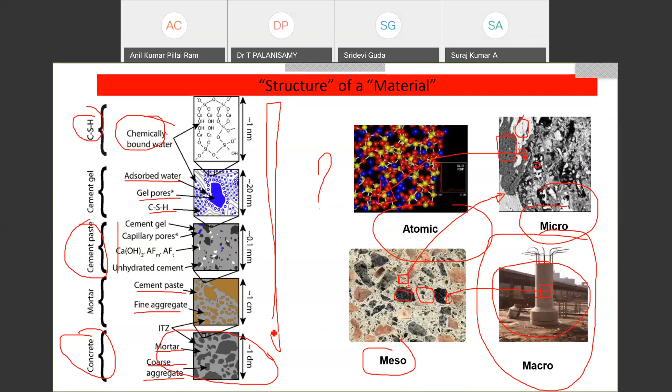So we are using this product as a concrete. We have these kind of stages to the micro characterization properties of the concrete. We will see one by one. Now this is the scales, size of scales in concrete. We don't know about that. What is the micro characterization of the concrete here?

But look at this small part of the LIC building at Chennai. Look at the small part. You have seen fine aggregate, coarse aggregate, and so on. Again you go finer in micro scale. You can get these kind of things, black and white, there is irregular nature, and so on. This is the size of scale in concrete.

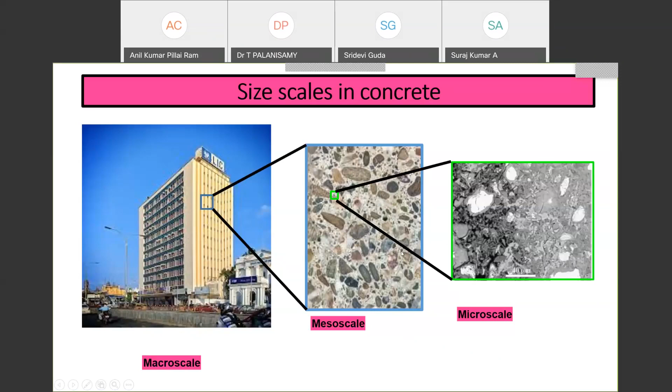But we are very strong in the compressive strength of that concrete. We have achieved nearly about 200 Newton per mm square. That is a 200 MPa concrete available. But the big question is, what is the durability of that kind of concrete? Then, why are we using the huge quantity of cement when compared to the steel? There are at least three primary reasons we are using the cement. They possess excellent resistance to water.

So look at the steel. Maybe put the steel in the water. What will happen? It tends to corrode. It is the cement and the concrete only that possess excellent resistance to water. It can be formed into a variety of shapes and sizes. That is a major advantage of the concrete.

It can be engineered. This word is very, very important. Engineered according to our convenience, according to our need, according to our consumption demand. We can produce, or we can manufacture, or we can change. That is the major advantage of the concrete. That's why most of the world's people use concrete, next to agricultural products.

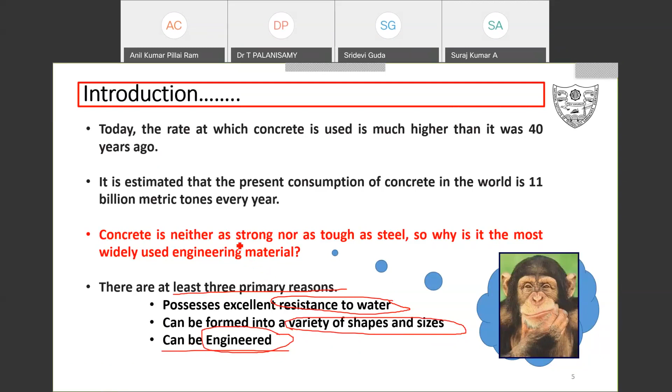Now, let's take a little bit of the fundamentals of concrete. What is concrete? In the older days the definition of concrete was different. The concrete is made of fine aggregate, coarse aggregate, water, cement, and so on. Now, the concrete is a filler and binder. Filler may be fine aggregate, coarse aggregate, fly ash, or mineral admixtures, or some admixtures, or any filler material, even thermocol also. The binder, you can have the cement or polymers, etc.

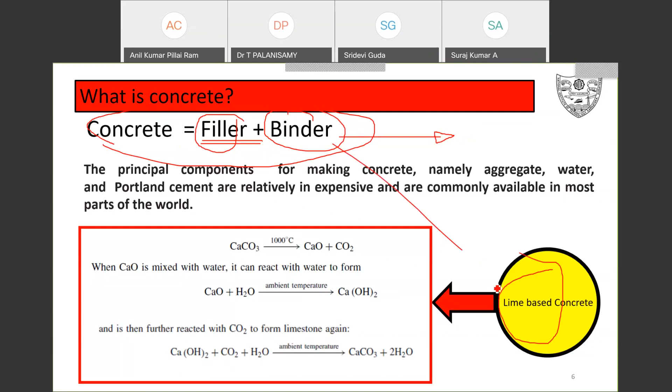Some even go for what we call gum also. It is possible to make it as a concrete. Suppose we use lime as the binder, it's called a lime-based concrete. Suppose we use gypsum, this concrete is called a gypsum-based concrete. Now, this is the cement-based concrete. Cement-based concrete, we have Portland cement, water, fine aggregate, coarse aggregate.

Already I told you that Portland cement and water is called cement paste. Again, we add the fine aggregate, it's called mortar. Again, you add coarse aggregate, it's called concrete. So these are the things. So I want to concentrate more on the cement paste. Cement paste, that is Portland cement plus water.

So people may ask, maybe BTech students or MTech students doing research or projects in concrete, how is this kind of thing very useful, or how does it reflect the exact answer of the concrete? Coarse aggregate is one of the filler materials in this concrete. So the material contributing more strength is cement paste. The mortar and the cement paste are the important materials for strength.

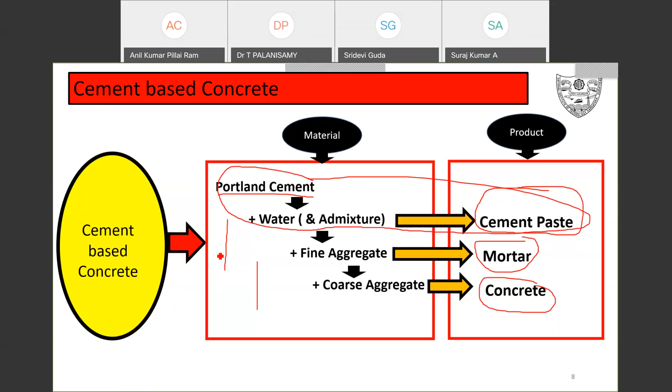Even in our research group, we are not doing most of the research in concrete. We are doing the research only on cement paste and mortar. Because if you go for the concrete, you waste material, also the time and the casting, everything. So we can do the research at the mortar level itself. If the result is positive, then only we go for the concrete. That's why we're doing the research.

So what is the limitation of the concrete? These are the limitations. Look at the brittle, the strain softening; this is quasi-brittle, this is ductile. Look at the difference between the concrete and the steel. The concrete, we have the failure like this. The steel, you have the well-defined thing called the strain hardening effect. Here, strain softening effect. Now, a lot of research is going on on how to make the concrete possibly like this.

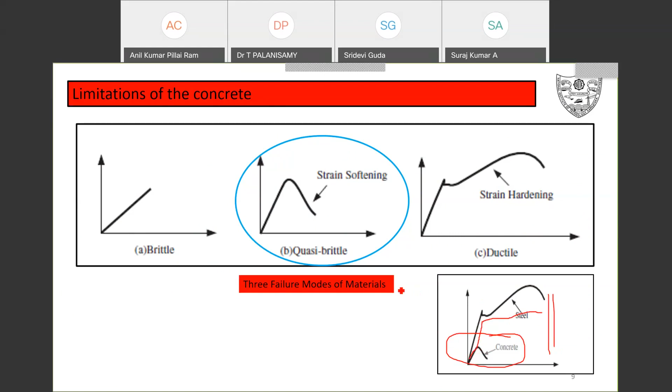So, a lot of research is going on regarding the limitations of concrete, even with how concrete and the cement industry use it. Now, introduction to Portland cement.

We produce the constituents from calcium, silica, alumina, iron, and sulfate. Where do you obtain these? Calcium comes from limestone available in our earth crust, marble, cement rock, alkali waste clay, chalk, sea-shells, etc.

Silica is nothing but quartz, a white color stone called quartz. Silica is also obtained from fly ash, clay, limestone, sandstone, etc.

We did very good PhD work in clay related things. We wanted to calcine the clay. One of my students, Dr. Sudha, completed work in this area of clay-based cement.

Then alumina comes from bauxite, fly ash, shale and slags. Then iron and sulfates. These are the constituents that make up cement.

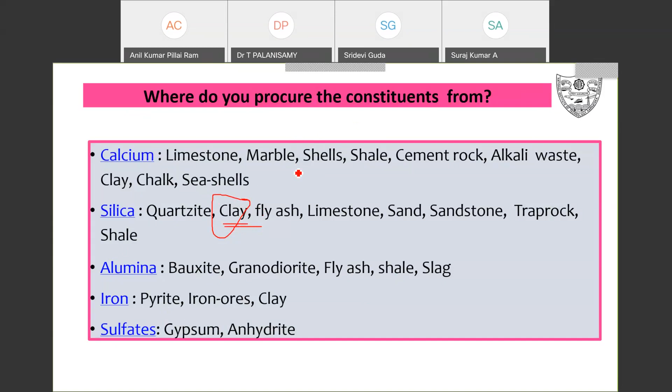Then compound composition of clinker or cement. Some places I may mention clinker and cement interchangeably. This composition has 4 major components formed from the oxides under high temperature in the kiln.

Name of the oxides: tricalcium silicate, called C3S, 3CaO.SiO2. Dicalcium silicate, 2CaO.SiO2, simply called C2S. Then tricalcium aluminate, 3CaO.Al2O3, that is C3A. Then tetracalcium aluminoferrite, 4CaO.Al2O3.Fe2O3, called C4AF.

These are the main compounds widely used in cement manufacturing. Now we want to look at, if I add water into the cement, which component reacts first, which component gives the most strength, and how to quantify these kinds of things we want to see today.

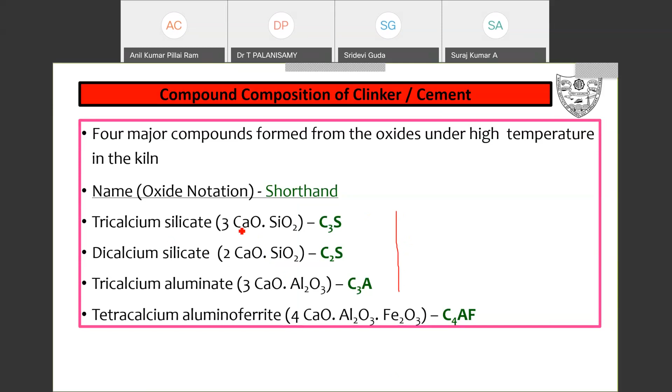Now, summary of the cement compounds - this may vary from brand to brand, and it varies with respect to special applications of the cement also.

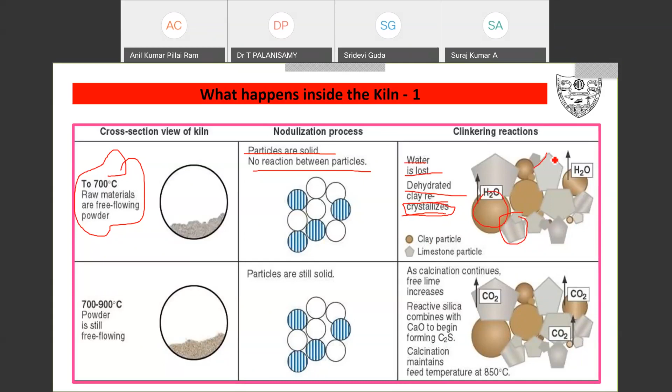Then dehydrated clay recrystallizes - this is called clay particles, you can see. Then limestone particles, you can see like this, a pentagonal shape. Then H2O is going out. This is the clay particles, this is the limestone particle. Now increase the temperature to 700 to 900 degrees centigrade.

Powder is still free flowing, particles are still solid. What is the reaction happening inside? As the calcination continues, free lime increases - this is calcination. Calcination is nothing but heating the limestone, it becomes a calcination process. Due to calcination, the free lime increases. Reactive silica combines with CaOH, as well as CaO, to begin forming the C2S compound.

The first compound forming in the cement is C2S. How does it form? Reactive silica combines with CaO, so we obtain C2S. The calcination maintains a feed temperature at 850 degrees centigrade.

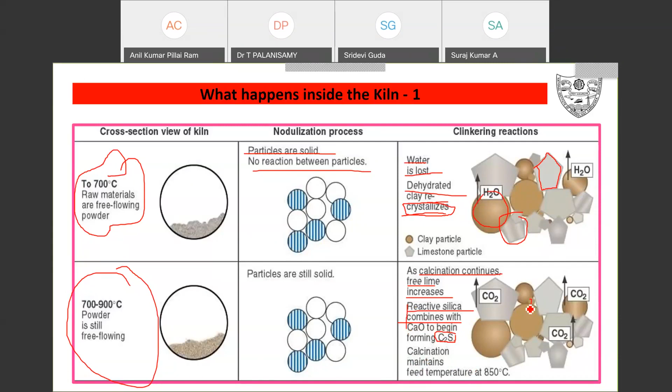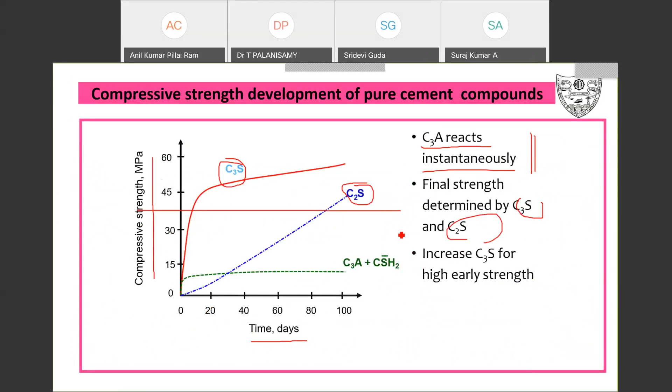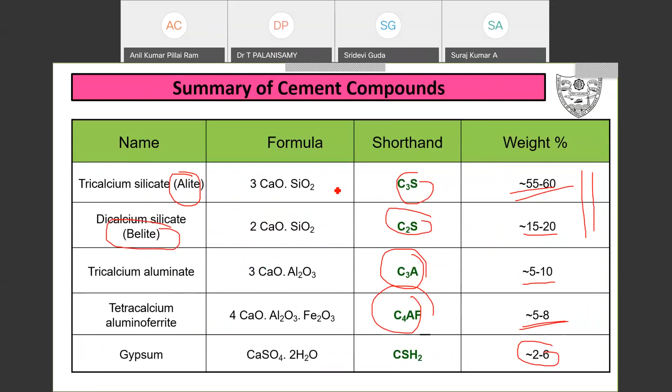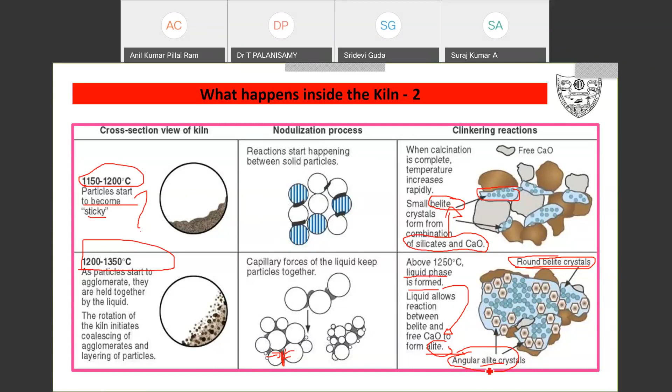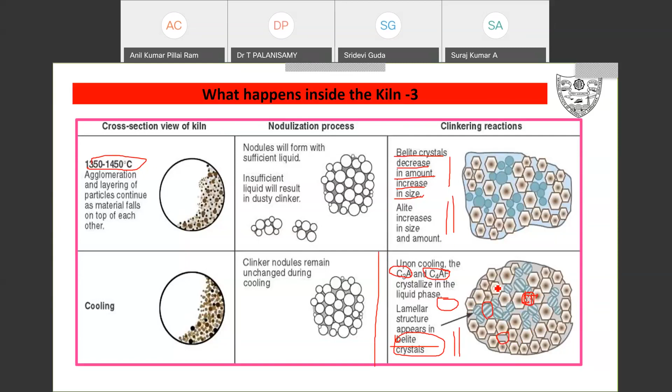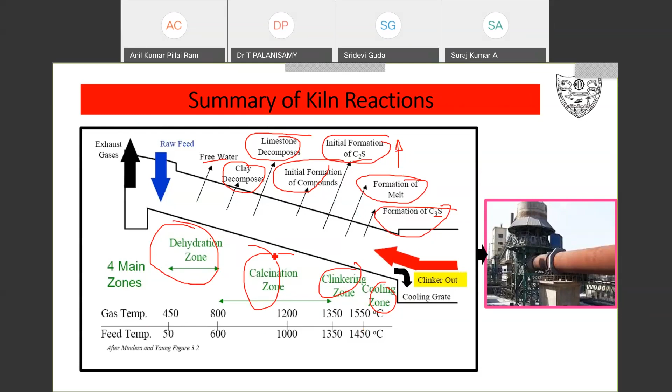The first component forming in the kiln is C2S, and lastly we see tricalcium silicate form around 1550 degrees centigrade. This is the typical picture of a kiln. Now, the approach to studying concrete - what is the necessity of studying the microstructure of concrete?

Microstructure of the concrete. So, look at... are you able to see it? Yeah, it's good. Now, the approach is to study the concrete.

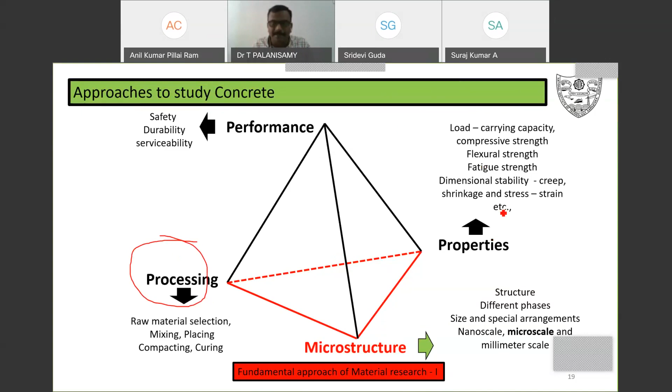What is the fundamental approach to material research? Before 1999, the structure was like this: one is processing as the main factor, and property; the other one is microstructures. With these three, we can achieve performance. Performance is nothing but safety, durability, serviceability.

Processing is nothing but raw material selection, mixing, placing, compacting, curing. Properties and microstructure mean the structures, different phases, size, spherical arrangements, special arrangements at micro scale and millimeter scale. Property is nothing but load carrying capacity, compressive strength, and so on. So in earlier stages, we were concentrating on processing, properties, and microstructures.

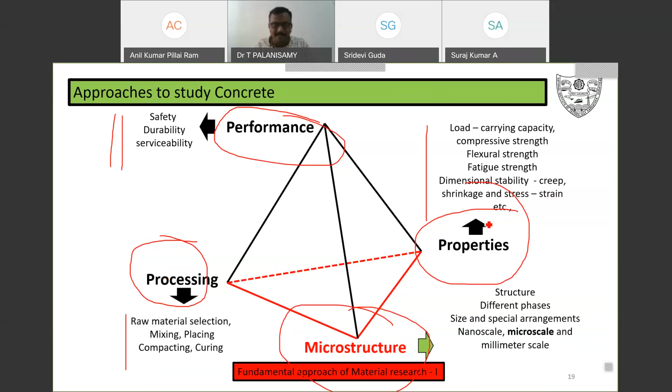Then, the fundamental approach to material research adds synthesis, processing, performance, properties, microstructures. From this, we can get end use or constraints. So microstructure is a very important factor to achieve this end use or use needs or constraints.

Again, measurements is an essential part of material science and engineering. At present, we are using these also. All these things are controlled by means of measurements, which is called quality control. Then only we can go forward. So microstructure is a very, very important factor at present to find what is the role of any material for the end users.

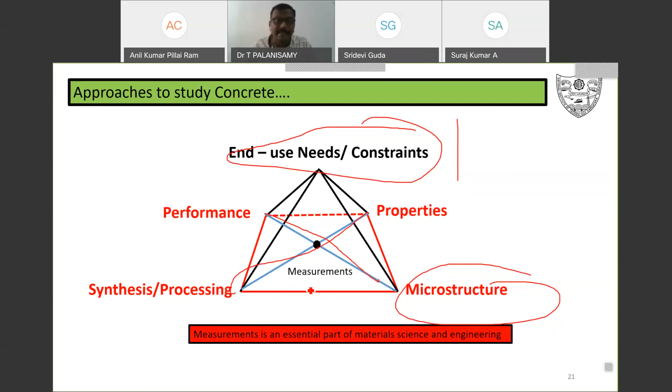Now, approach to the concrete study. A close look at the historic development of concrete shows that concrete has been applied in practice for more than 150 years without any scientific background. I'm not saying this, this is said by P.K. Mehta. Most practice followed empirical formulas and observations.

In olden days, attention was paid mainly to properties of concrete, especially compressive strength. Most research people worked in this area of compressive strength; very few did research on performance-wise and durability aspects. Very limited understanding had been achieved on the material structure of concrete because of the lack of instrumentation facilities at the nanometer, micrometer, and even millimeter scale.

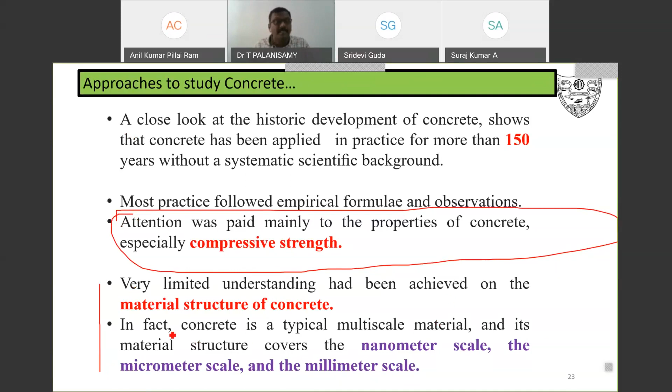Now, approach to concrete study. The concrete phases at nanometer scale mainly constitute the calcium silicate hydrates. Hereafter, I will speak more about CSH, that is calcium silicate hydrates. It is believed that CSH contributes most of the binding strength.

CSH contributes most of the binding strength, and understanding the nature of CSH is key to revealing the behavior of concrete. So CSH is a very important factor. The structure of CSH at the atomic level determines the nature of mechanical properties, transport mechanism, and dimensional stability of hydrated cement paste. So CSH is a contributing factor for mechanical properties and transport mechanism.

Transport mechanism means, if a building is constructed near the seashore, like in Chennai or Visakhapatnam, the air there attacks the concrete. The chloride is present in this water as well as air - airborne chloride and waterborne chloride. These chlorides easily enter into the structure, and concrete acts as a transport mechanism for these chloride ions to enter the reinforcement, causing it to corrode, and the life of the structure will be lost. So the contributing factor for this transport mechanism is CSH.

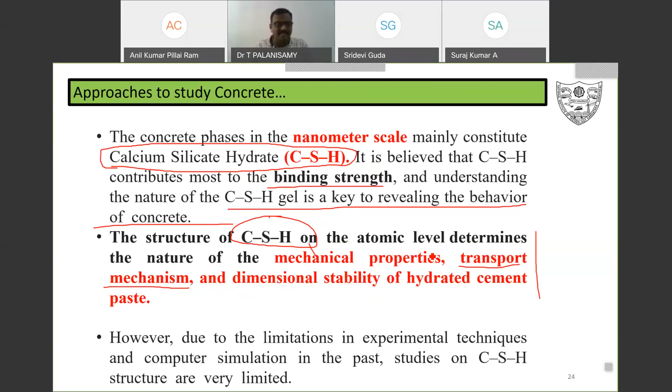However, due to limitations of experimental techniques and computer simulation in the past, studies on CSH were very limited. Nowadays, with the fast development of microstructure measurement technology and powerful computer simulation methods, it is possible to develop concrete technology in a more scientific manner, even at the CSH level. That is the advantage at present - we can do this research at the CSH level. Then, what else do you need?

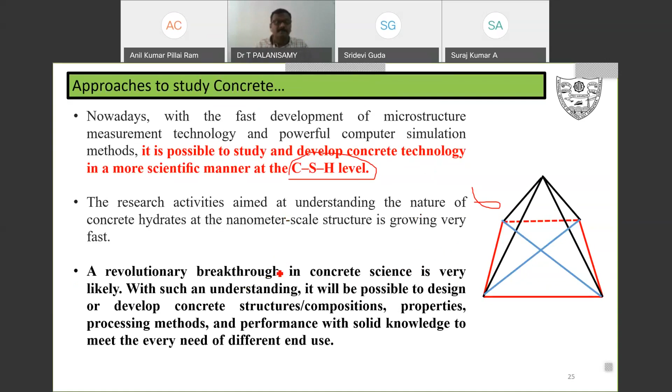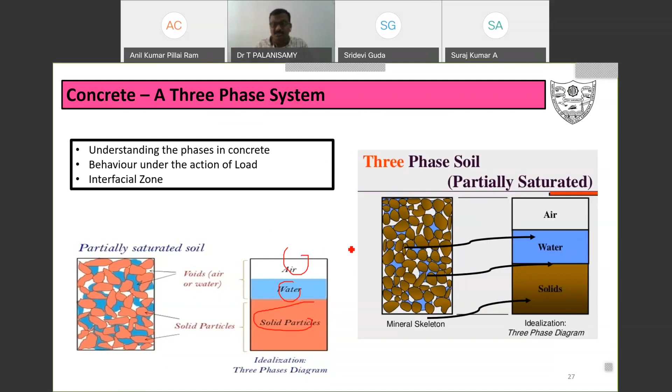Look at, concrete is a three-phase system. We have seen this three-phase system in soil mechanics also. For the calculation purpose, we can look at soil like this: solid particles, air and water. This is the three-phase diagram for the soil. Similarly, here also, look at the concrete three-phase system.

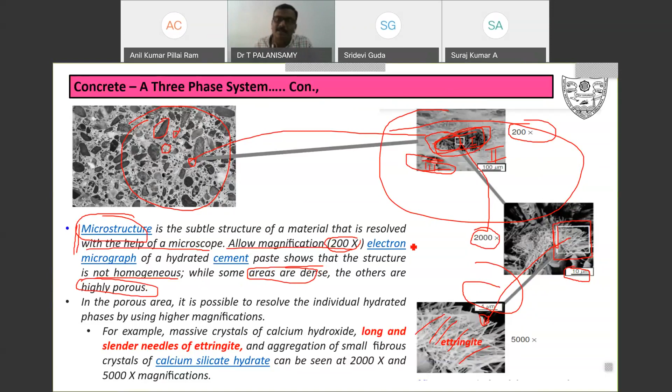Now, the structure is not homogeneous. Some areas are dense and others are highly porous. This area may be dense in nature, this area porous in nature. In the porous area, it is possible to resolve the individual hydrated phases by using higher magnification.

For example, massive crystals of calcium hydroxide, CH, and long and slender needles of ettringite. I will tell you what ettringite is. Suppose you look at a scanning electron microscope, SEM, and see any needle-like structures; they may represent ettringite. How it forms, I will tell you.

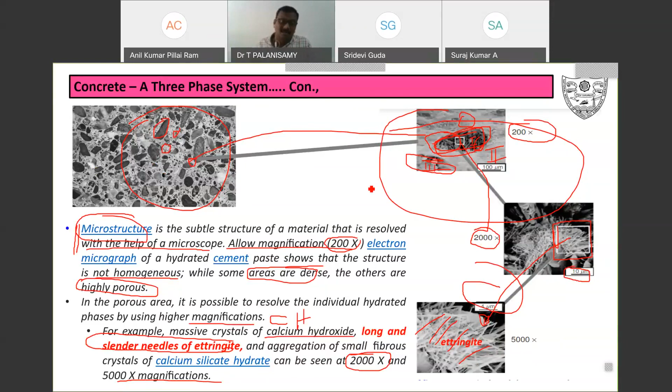And aggregation of small fibrous crystals of calcium silicate hydrates can be seen only at 2000 and 5000 magnification. So what I'm trying to say is there is a lot of heterogeneity, a lot of non-homogeneity in this concrete, which you can see only through microcharacterization of the concrete.

Now, the microstructure of concrete can be described in the following three aspects. One is hydrated cement paste, which represents the hydration products of the cement and water reaction. If you add water to the cement, the reaction starts, and the product is called the hydration product. The main product of this reaction is calcium silicate hydrate. I want to talk much more about this area.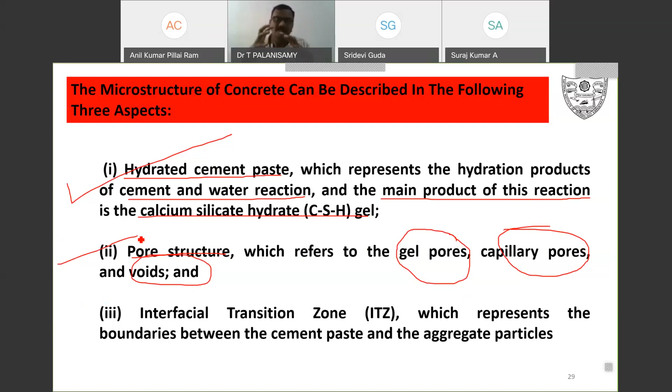The other one is pore structure, with reference to gel pores, capillary pores, and voids. Reducing the water cement ratio is good for strength and durability. But in the field, some people may not follow the water cement ratio strictly, and may not compact the concrete well. What will happen? In between the aggregate we have gaps, called pores. Honeycombs tend to form. I'm not talking about that.

Inside this microstructure, at the micro level, what are the pores, what is the capillary, what are the voids? These kinds of things I want to speak more about. Then the interfacial transition zone, called ITZ. This represents the boundaries between the cement paste and the aggregate.

This is another major area. I'm not talking much more about this; we need one more day to discuss the interfacial transition zone and how to quantify all those things. I want to take these two only. Now,

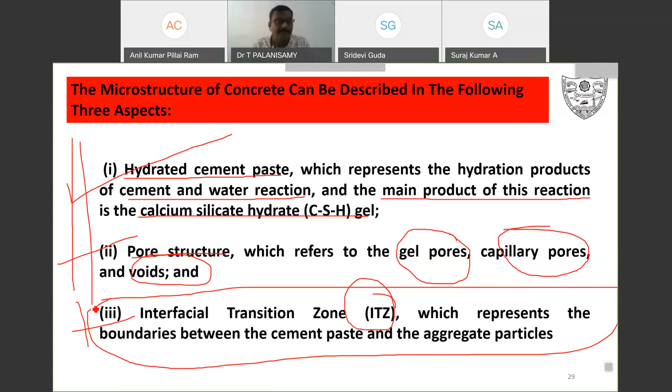instruments for microstructure: scanning electron microscopy, called SEM; transmission electron microscopy, called TEM, T-E-M; atomic force microscopy, called AFM. According to your convenience and your research, you can choose the scanning electron microscope, transmission, or atomic force microscope. Suppose I want to deal with any material at the nanostructure level, meaning magnification maybe 10 lakhs, you go for AFM and TEM.

We can find some details of CSH. Suppose I want to know about the arrangement and juxtaposition of cement paste particles, sand and capillary voids, you can go for intermediate SEM. Then high magnification SEM, with magnification 2000 to 20,000.

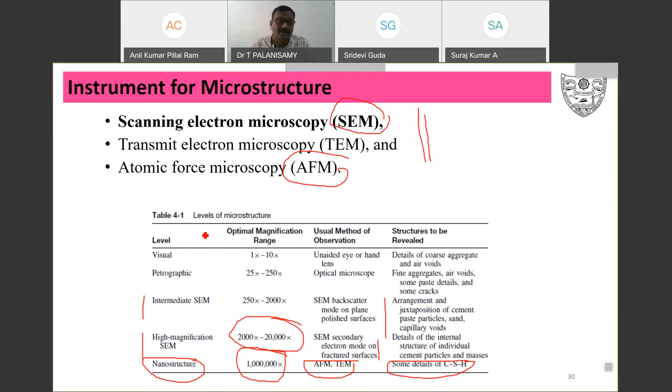Scanning electron microscope, secondary electron mode: on fractured surfaces, we can find details of the internal structures of individual cement particles and masses. This is according to our convenience only. We go for different types of instruments for micro characterization.

Then the microstructure of the hydrated cement paste. The term hydrated cement paste used here refers to the paste made from Portland cement and water. That is called hydrated cement paste.

Unhydrated Portland cement is a gray powder composed of angular particles, typically in the size range of 1 to 50 micrometers. It is produced by pulverizing clinker with a small amount of calcium sulfate, the clinker being a heterogeneous mixture of several compounds produced by high temperature reactions between calcium oxide and silica, alumina, and iron oxide. These things happen inside the kiln, as I already told.

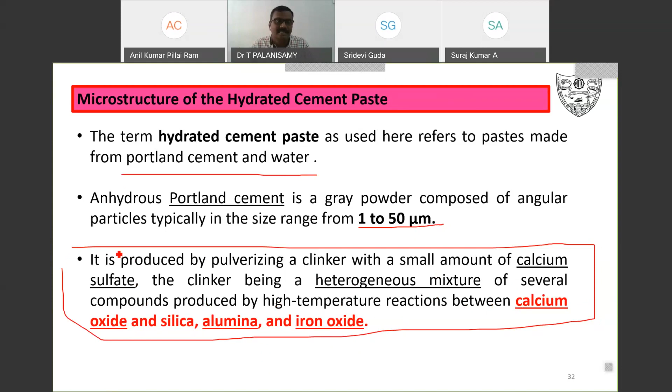Then the microstructure of the hydrated cement paste. I come to the exact picture today. The chemical composition of the principal clinker compounds corresponds approximately to C3S, C2S, C3A, and C4AF, like this. In ordinary Portland cement, the respective amounts usually range between 45 to 60, 15 to 30, 6 to 12, and 6 to 8%.

Now, when Portland cement is dispersed in water, what will happen? The calcium sulfate and the high temperature compounds of calcium begin to go into solution, and the liquid phase gets rapidly saturated with various ionic species. As a result of interaction between calcium, sulfate, aluminate, and hydroxyl ions, within a few minutes of cement hydration, needle-shaped crystals of calcium trisulfoaluminate hydrate are formed.

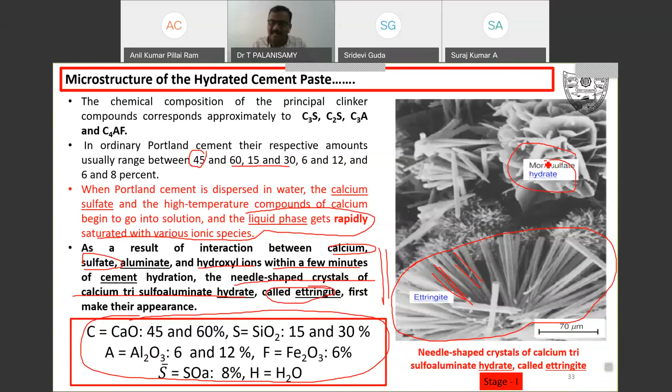So how does it show? Using the scanning electron microscope, you look at the cement paste and see this kind of structure. This is represented as the ettringite structure: the needle-shaped crystals of calcium trisulfoaluminate hydrate are called ettringite. Monosulfate, I'll tell you how it forms.

What we want to look at here is, what is the density of this ettringite? What is the length? How can we measure it? This is another stage, advanced microcharacterization. Again, microstructure of hydrated cement paste.

What happened? A few hours later, then a few years later, the large prismatic crystals. What are prismatic crystals? Already told you, these things are studied in geology. Prismatic is like a pencil. This prismatic crystal shows a uniform cross section. Typically, they have 3, 4, 6, 8 or 12 faces which are parallel to the crystallographic axis.

Crystallographic axis is nothing but we want to rotate these materials in this direction. How many faces? Suppose this axis, how many faces? Like this, you can find the crystallographic axis.

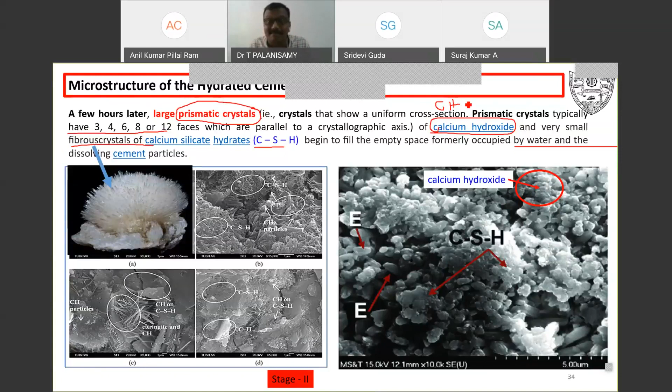Then a few hours later, large prismatic crystals of calcium hydroxide, CH, and very small fibrous crystals of calcium silicate hydrates begin to fill the empty spaces formerly occupied by water and dissolved cement particles. What is the next one formed? Next formed is CH, calcium hydroxide. Another one, CSH, forms. So these two things fill the empty spaces of the water.

Suppose you add more water, what will happen? Water stagnates inside this concrete. There are no spaces given to the CSH and CH formation. Now look at this, some fiber crystals, calcium silicate hydrates with sharp fiber crystals. So look at this, the CSH, calcium hydroxide. You have seen this kind of thing now. That is called as a, like needles.

Needles. Now, why does it become black and white? We know about the BTech students; for them, I spend 2 minutes here. Look, suppose this is any product, any metal. I want to pass the light. What will happen? If it's metal, it immediately comes back, a reflector. This light also has some amplitude. With respect to this amplitude, it's coming back immediately.

Suppose these areas may be vacuum or voids. The light goes in this direction, it takes more time coming back. So these areas may be black in color. Voids, any gap or any vacuum, you can see as black in nature. Metal is very dense, it looks white in nature. You look here, it is gray in nature.

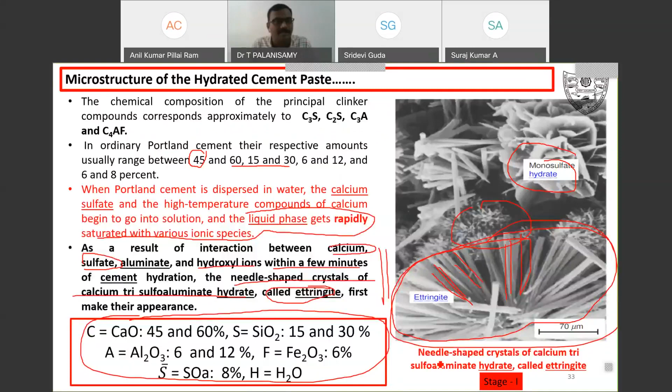In primary ettringite formation, the structures look like needles, right? Secondary ettringite formation forms monosulfoaluminate hydrates that look like plate-like structures, a hexagonal plate morphology. Hexagonal plate morphology is nothing but, look like this, like the petals of roses. Rose petals with some seeds. These structures are called hexagonal plate morphology. Now, the needle-like crystal structures become like a hexagonal plate morphology.

So, this is primary ettringite formation. This is secondary ettringite formation. Suppose you look at any scanning electron microscope images, any needle shape you have seen is called primary ettringite formation. After that, we have seen these kinds of petals. This is called secondary ettringite formation.

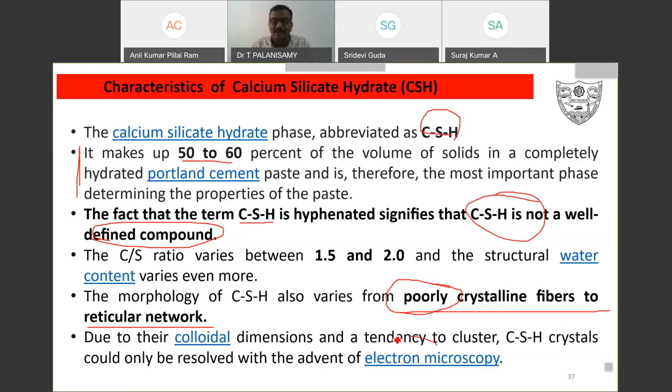Due to their colloidal dimensions and tendency to cluster, CSH crystals could only be resolved with electron microscopy. The surface area is of the order of 100 to 700 square meters per gram. The strength of the material is attributed mainly to van der Waals forces. If chemistry people do research, they can study how adding mineral admixtures to the cement paste changes the van der Waals forces. The size of the gel pores, the solid to solid distance, is reported to be about 18 angstroms.

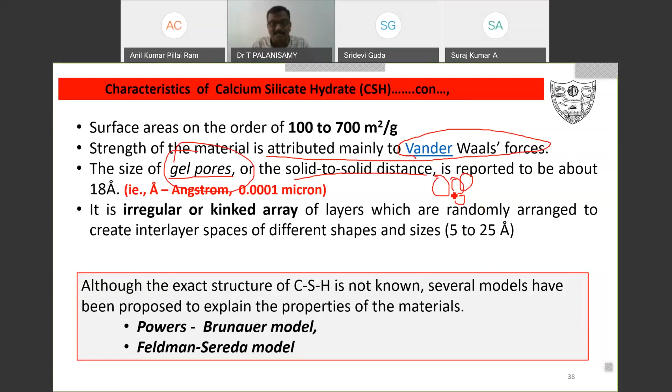What is a gel pore? The CSH gel forms here, one gel here, another gel here, so in between we have some pores. That is called a gel pore. This is the micro level structure. It is an irregular or kinked array of layers randomly arranged to create interlayer spaces of different sizes, 5 to 25 angstroms, one over another.

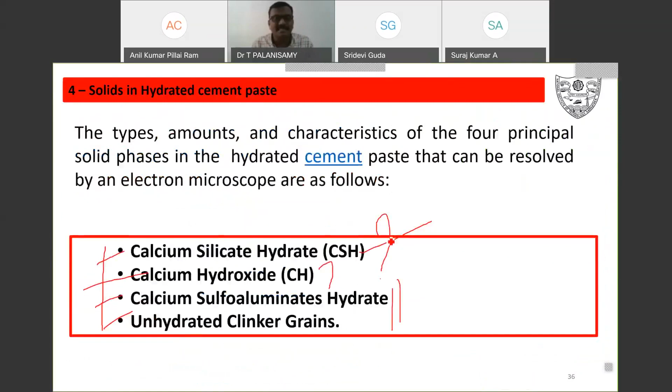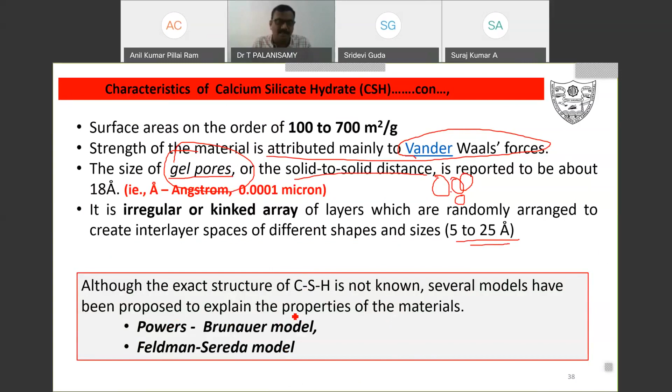Next, the first solid is CSH. The second solid is calcium hydroxide, called CH. This contributes 20 to 25% of the volume of solids in the hydrated paste. So if researchers add any materials into the cement for fundamental development of the cement, they want to look at how much CSH content we have, in contrast to CH, calcium hydroxide.

Sir, can you see my PPT? Yeah, we can see your PPT. Okay, I have some message. Okay, fine. That might be the bandwidth at that person's place. That's right. Okay, fine, sir.

I will continue. In contrast to CSH, calcium hydroxide is a compound with definite stoichiometry, a well-defined shape. Look at calcium hydroxide, CH: we have seen a well-defined hexagonal shape. But look at CSH; you are unable to say the shape, it may be different. So using a scanning electron microscope, the well-defined structure may be represented as CH, calcium hydroxide, and the not well-defined shape may be CSH.

It tends to form large crystals with a distinct hexagonal prism morphology. The morphology usually varies from nondescript to stacks of large plates and is affected by available space, temperature of hydration, and the impurities present in the system. Impurity is nothing but unhydrated cement particles.

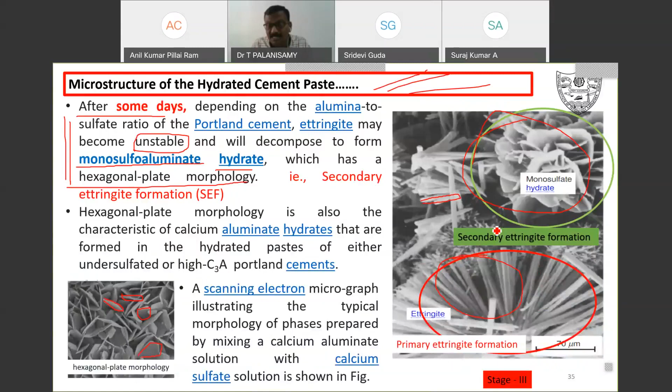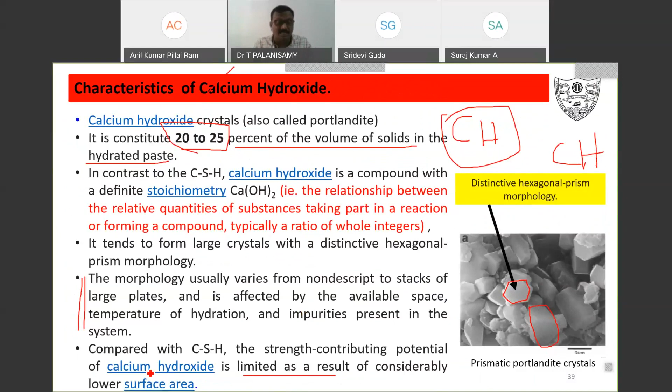Compared with CSH, the strength contributing potential of calcium hydroxide is limited as a result of its considerably lower surface area. So why does CH not contribute much to the strength of the concrete? Because its surface area is very less. In CSH, you have a huge surface area. CH has very different structures, plate structures, so its surface area is very less, and because of this it does not contribute much to the strength.

Then calcium sulfoaluminate hydrate. This is another solid in the hydrated cement phase. Calcium sulfoaluminate hydrates occupy 15 to 20% of the solid volume in hydrated cement. Therefore, they play only a minor role in the microstructure.

It has already been stated that during the early stages of hydration, the sulfate/alumina ionic ratio of the solution phase generally favors the formation of trisulfate hydrate, called ettringite. It forms needle-shaped prismatic crystals. That is called sulfoaluminate hydrate.

So this is the more important and key factor for sulfate attack. Anyone working on sulfate attack looks at this kind of structure: how it forms, what is the density, the porosity, the length, the depth. So this is directly related to sulfate attack.

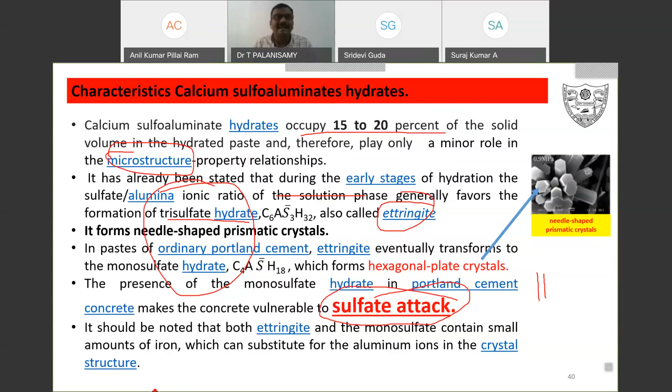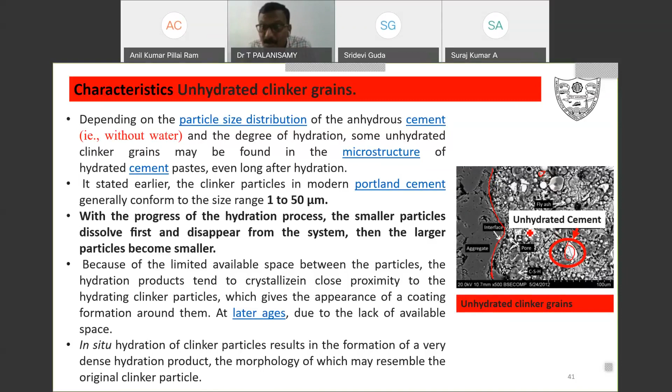This may be fly ash. This is aggregate. This is the interface, as already told. This is aggregate. This is the pore. This is C-S-H. And so on. So this is the model for hydrated Portland cement.

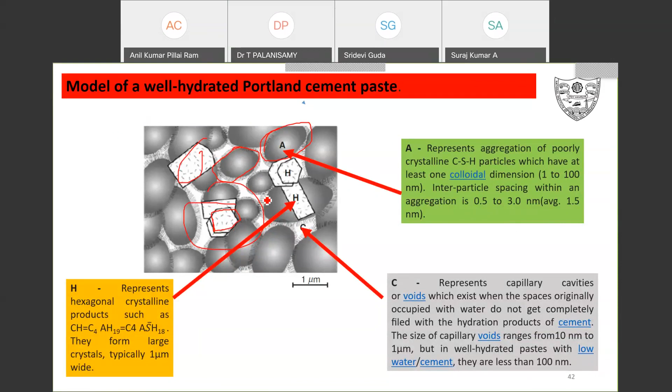So C-S-H is irregular in shape, as you have seen. This is the model. This is the secondary hydrate formation. This is the aggregate. So this is the model. Different models are available; if you want to go deeper, you can refer to this.

So I want to finish within 10 minutes. Yes, sir. Permits. You can go ahead. Yeah.

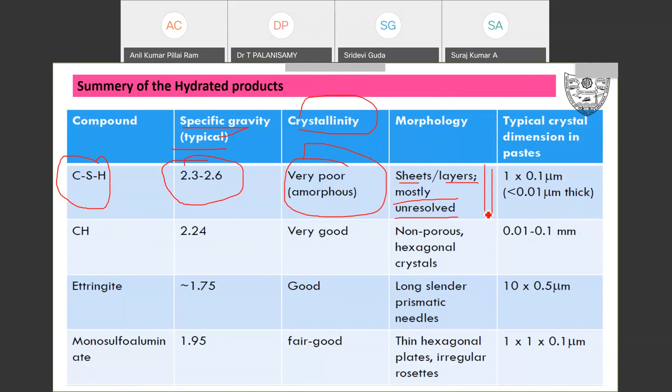Then morphology: sheets, layers, mostly unresolved. That is the problem. Typical crystal dimensions in the paste are 1 x 0.1 micron or 0.01 micron. Then CH, the density is 2.24. Very good crystalline nature, not porous. Hexagonal crystals, the dimension is 0.01 to 0.1 mm.

Then ettringite, approximately 1.75. It has good crystallinity. Long slender prismatic crystal needles, like this pencil, 10 x 0.5 micron. Monosulfoaluminate, 1.95. Fair to good, thin hexagonal plates, irregular rosettes. So this is the size.

Now, suppose I give some images; you can identify whether it may be C-S-H, CH or ettringite, or what type of structure it is. That is more than enough for this presentation.

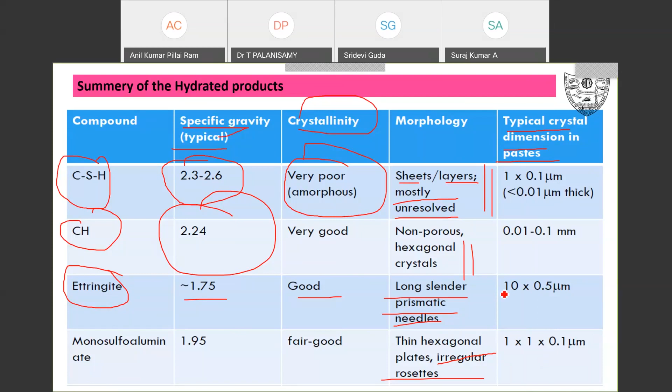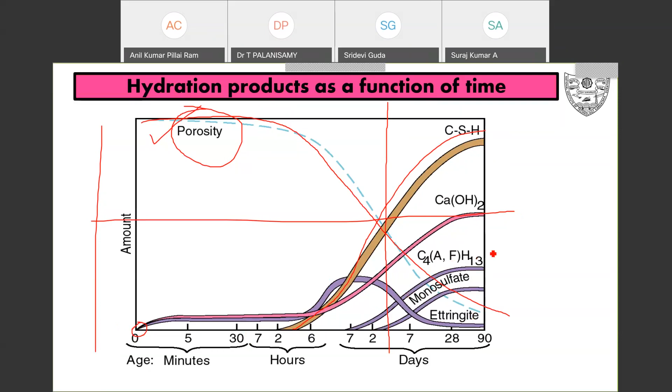We can see that C-S-H forms within an hour. Then ettringite forms immediately. Then after hours CH forms. Then C4(A,F)H13 and monosulfate form, and so on. A number of models are available. This is one typical model.

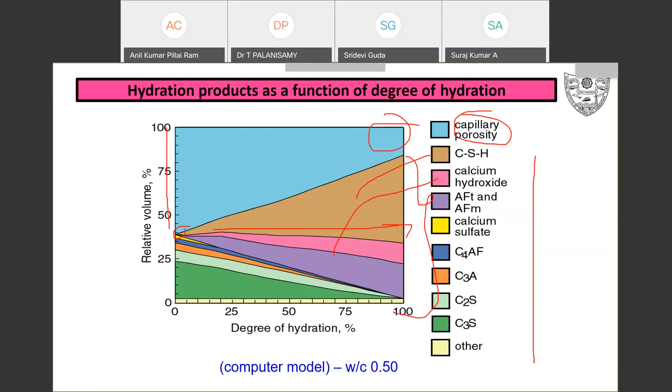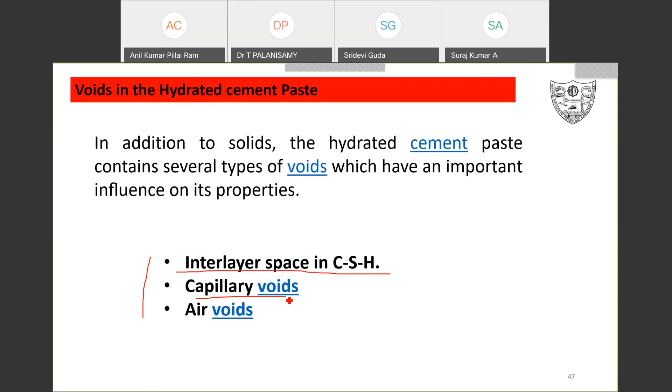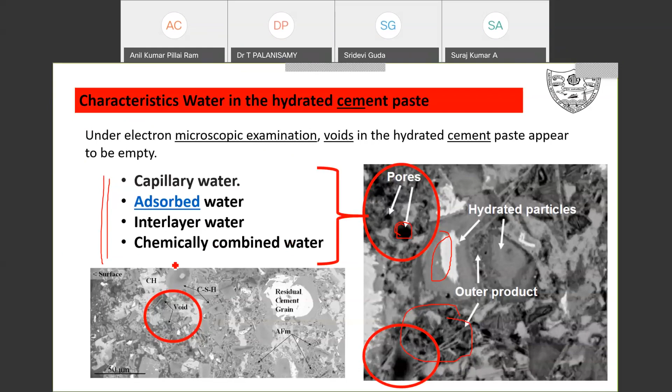Even the characteristics of water in the hydrated cement: we have capillary water, adsorbed water, interlayer water, chemically combined water. I'm not talking about the water available on the surface of the concrete. What are the waters available inside the CSH, at the cement paste? One is capillary water, adsorbed water, interlayer water, chemically combined water.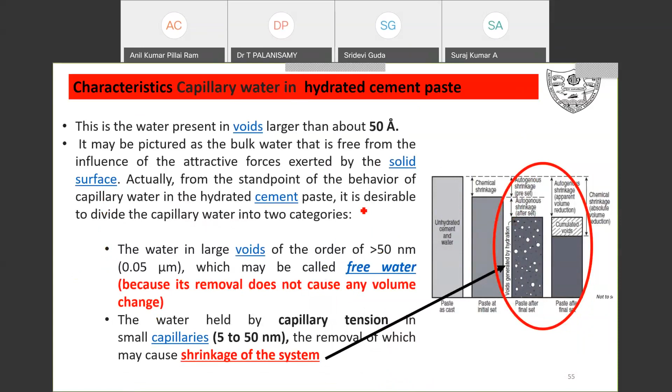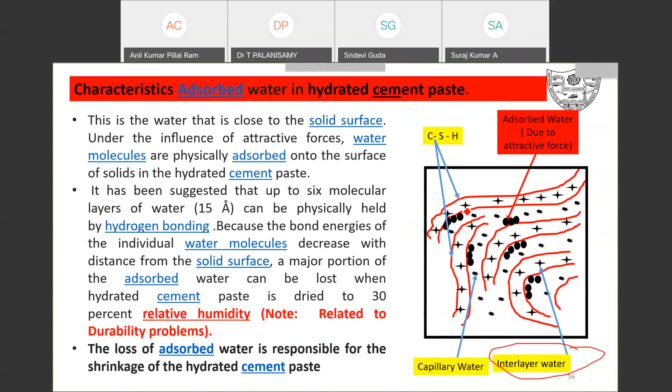Let me show this one picture. Look at this CSH layer. In between the layer, we have that water. That water is called interlayer water, in between the two CSH layers. CH layer, all of you know about that. This is a CSH sketch.

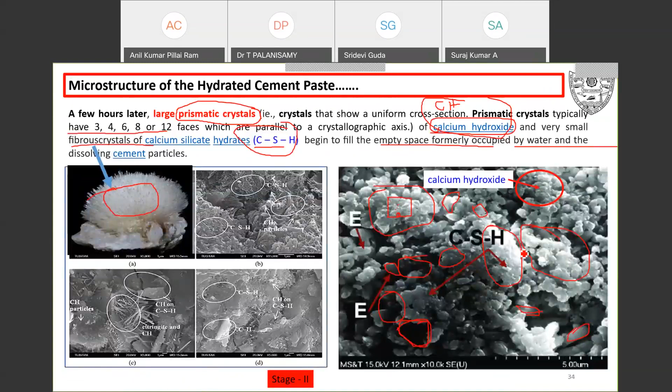I showed that figure also, no? This is the CSH sketch. So in between we have some water, that is called interlayer water. Then in between we have some water, that is the capillary water. In between those layers we have the capillary water.

Another one is adsorbed water. On the surface of the CSH structure we have some water here, that water is called adsorbed water. So we have chemically bound water, capillary water, interlayer water, and adsorbed water. These waters are also highly related to the density of the concrete, strength of the concrete, as well as the durability of the concrete. These kinds of water are highly related to the shrinkage property of the concrete.

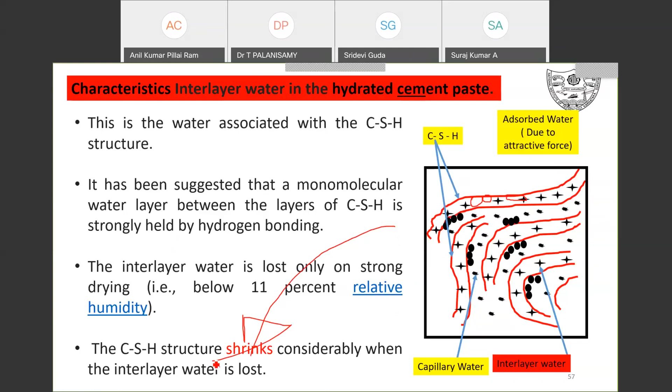So suppose you want to take up any research in micro characterization, especially if you take shrinkage, you want to link it with CH formation, and so on. So this is called interlayer water, this water is called interlayer water, this is capillary water. This is CSH, in between this we have the water, that water is called capillary water.

Physically adsorbed water is nothing but this: this is a CSH layer, on the surface layer we have the water, adsorbed water, that water is called physically adsorbed water. In between the layer is called interlayer water, this is one phase of CSH, in between we have interlayer water, this is the capillary water, we have the capillary water. I thank Professor P.K. Mehta, I copied this from him.

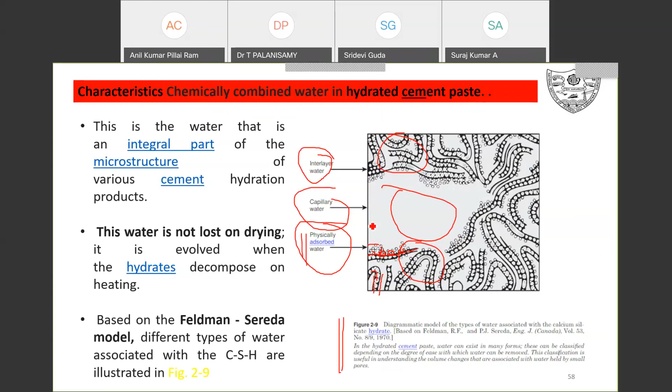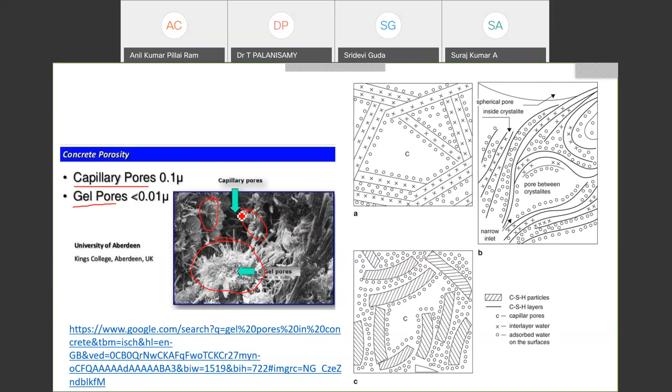Now there is some instrumentation available to find the capillary porosity and gel porosity. First, let me talk about capillary porosity, one or two minutes I'll finish. Capillary porous, gel porous: so this is the gel, CSH gel, this is another gel, we have another gel, and in between we have the porous. Look, we have the porous, this is called capillary porous. In between the gel, we have the porous, that is called gel porous. Clear now? That is the difference between capillary porous and gel porous.

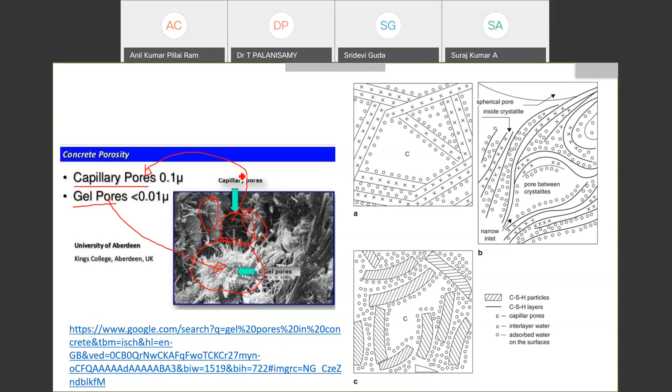Using mercury intrusion or extrusion technique, we can calculate how much porosity there is, what is the gel porosity, density, and so on. This is the typical example of capillary porosity.

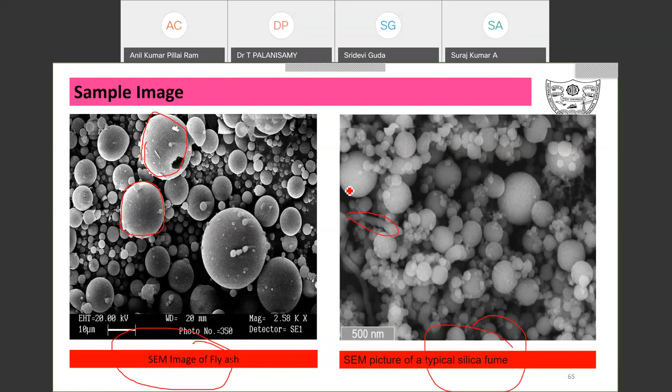Suppose you go for deeper study, we can find what exactly this is. So through EDAX study, you can find the exact compound present in this particular section.

Then again you go for further study - what is the ratio between gel porous and capillary porous? Then what about total solids - you take the gel solids also. What is the relationship? Please go for more studies on this.

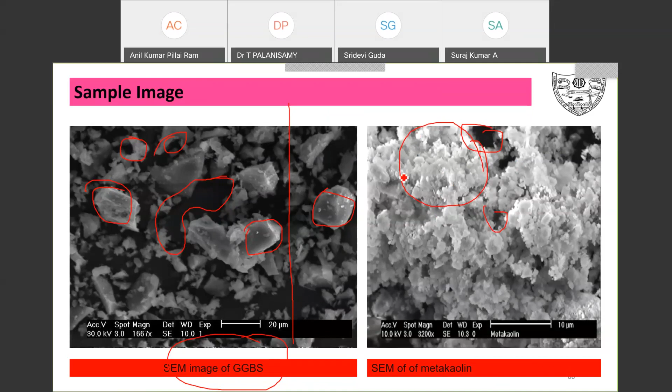Look at this, it's another typical example of metakaolin - the SEM images with different magnification and different sizes.

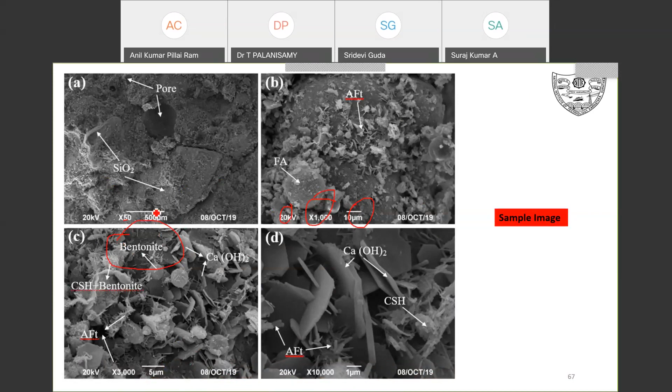Already you have some knowledge in chemistry, so you can easily find what type of structure is inside. So you go for NMR spectroscopy and microscope studies.

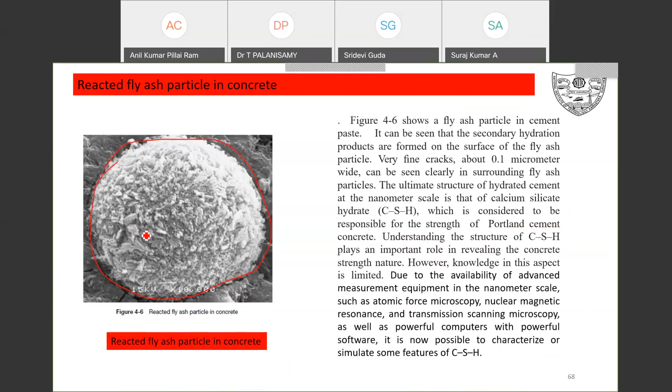So this is reacted fly ash. Before this, I showed unreacted fly ash - this is reacted fly ash like this. Look around, we have some portion also. This is the typical example of a fly ash particle. I copied this from that Li book.

Thank you. So with these things, I want to conclude my talk. I definitely know that I've touched only a little bit regarding the micro characterization of concrete - using SEM images, how we can identify CSH or CH, how to calculate capillary water or gel porous, dense density, and so on. It's just a little bit of knowledge.

If you want more, you can go for further study and get a lot of ideas. If you want to extend the research in these areas, we have a very good and wider scope also. So please do the research. If you have any doubts, you may communicate with us. We are ready to work with you, and we are ready to collaborate in research as an industrial person as well as with academic institutions.

So from this, I want to conclude my talk. I thank the organization for giving me this opportunity. If there are any questions, I will answer within my purview, and it's possible I will share the question and answer session too. And I ask Dr. Anil K. Pillai to coordinate these things.